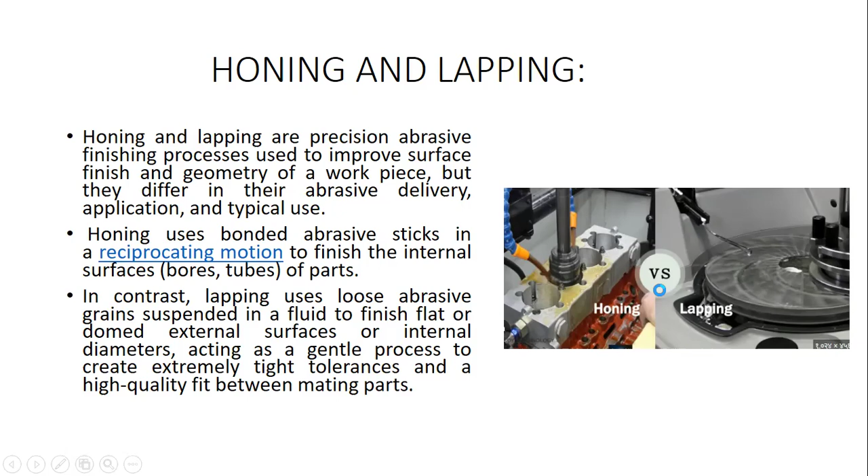So here we can see the pictorial representation of the honing process as well as lapping. The purpose of the honing process is to enhance the geometry and create a more precise, fine cross-hatched surface finish on the internal diameter of the hole.

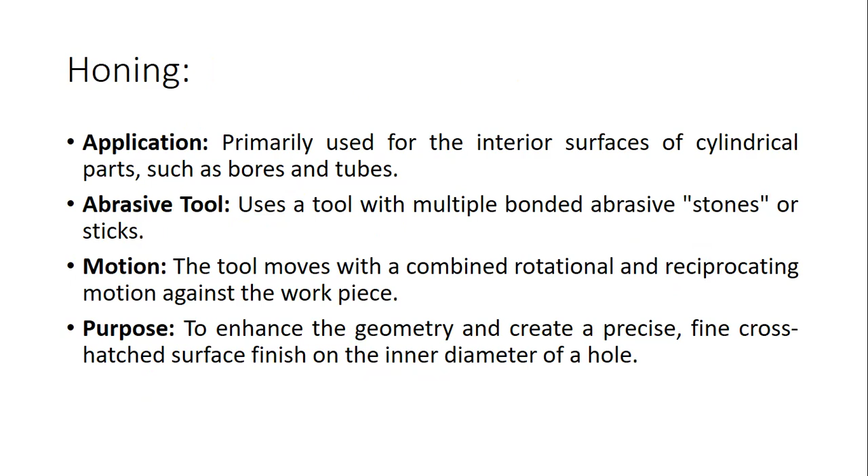The application of lapping, the next subsequent operation: it is used for both internal and external flat surfaces to correct minor imperfections in the material by achieving the precise dimension. Here the abrasive tool utilizes loose abrasive particles suspended in a fluid that are pressed between the workpiece and a soft lap tool.

The workpiece is typically pressed against a rotating lap plate, which can also rotate or reciprocate sometimes. The main purpose is to create a superior surface finish, perfect flatness in the material, and an extremely close fit between the two mating components by removing minimal material.

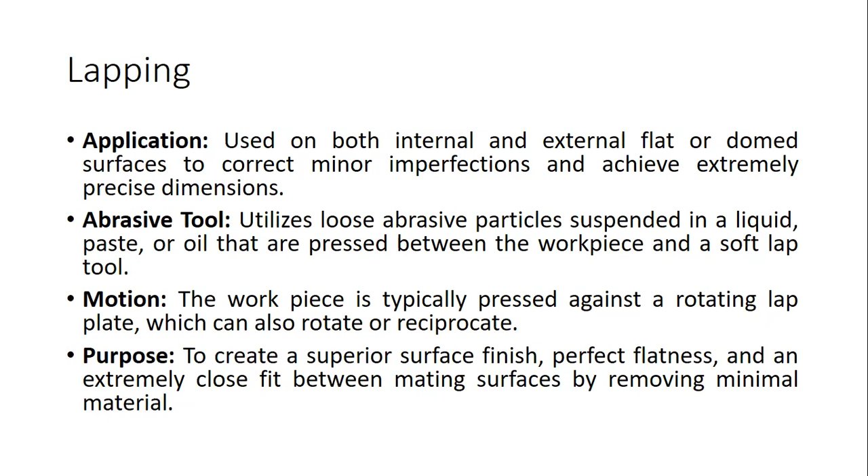What are the main key differences between the two processes? In terms of abrasive, honing uses bonded abrasive, lapping uses loose abrasives. Workpiece: honing is used only for internal diameter surfaces. Lapping can be used for both internal and external surfaces. Honing is a combined rotational and reciprocating motion. Lapping involves pressing the workpiece against a lap plate.

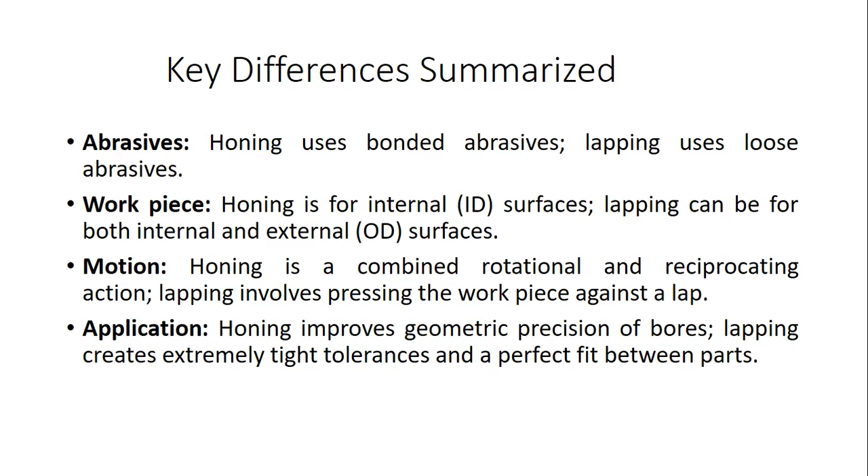Application: honing improves the geometric precision of the hollow bore diameter of cylindrical jobs. Lapping produces an extremely tight tolerance and perfect fit between the two assembly components. So these are some of the key contrasting features of the honing and lapping operations.

The next surface finishing process we are going to discuss is polishing and buffing. So what do you mean by polishing and buffing? It is considered to be a surface finishing process that tries to smooth out the workpiece surface by using an abrasive on a rotating wheel.

Polishing uses high-grit abrasives firmly attached to a surface like a belt or a disc to remove some of the deep scratches and imperfections, creating a lined, brushed finish. Buffing uses a softer rotating wheel with a fine, loose abrasive compound to remove the fine lines from polishing, resulting in a bright mirror-like luster.

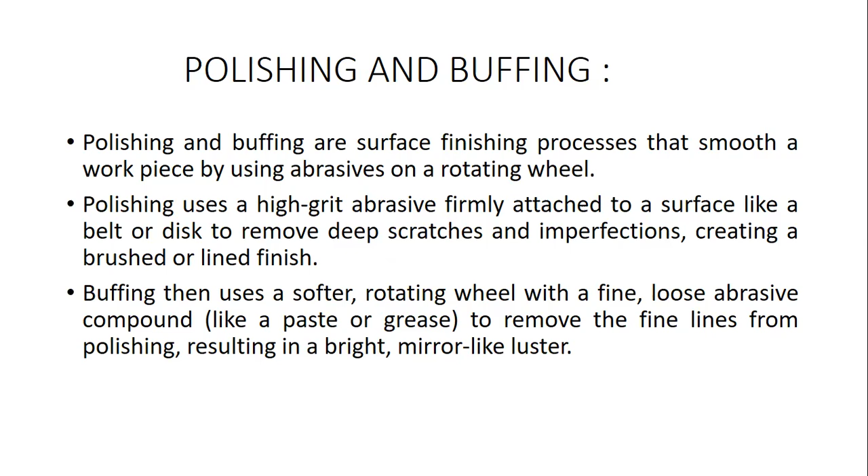So let us understand the polishing process. Initially we have to do the surface preparation of the material. The surface is cleaned to remove any dirt, oil marks or contaminants that would interfere with the process. Then applying the abrasive: a polishing tool such as an abrasive belt or a wheel with a disc is used.

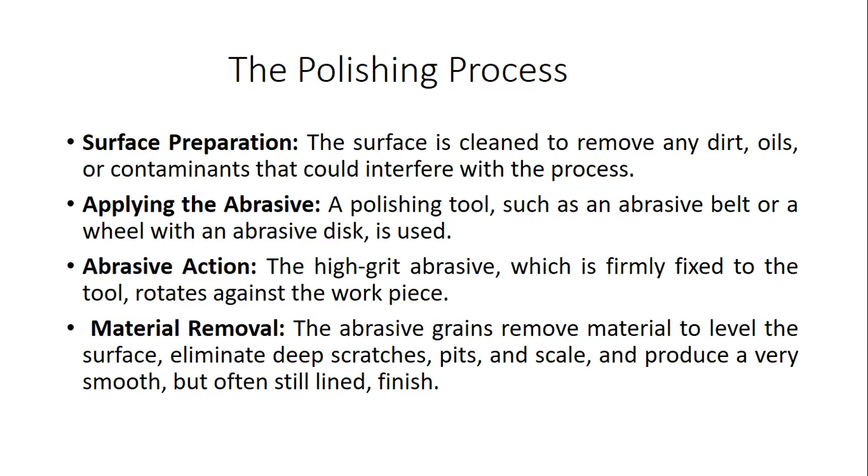Then the high grit abrasive which is firmly fixed to the tool rotates against the workpiece. Then the abrasive grains remove the material to the level according to the surface finish expected by eliminating the deep scratches, pits and scale formation and produce a very smooth surface finish component.

So in terms of buffing process, here the surface refinement can be done by polishing with the help of the prerequisites to ensure whether the surface is smooth enough for the final luster. Abrasive application: a loose fine grit abrasive compound is applied to the rotating flexible cloth wheel.

Buffing action: the rotating cloth will act as a carrier for the compound, which will try to gently remove the fine lines from the polishing stage. So this process creates a final bright mirror-like surface finish, achieving a high luster.

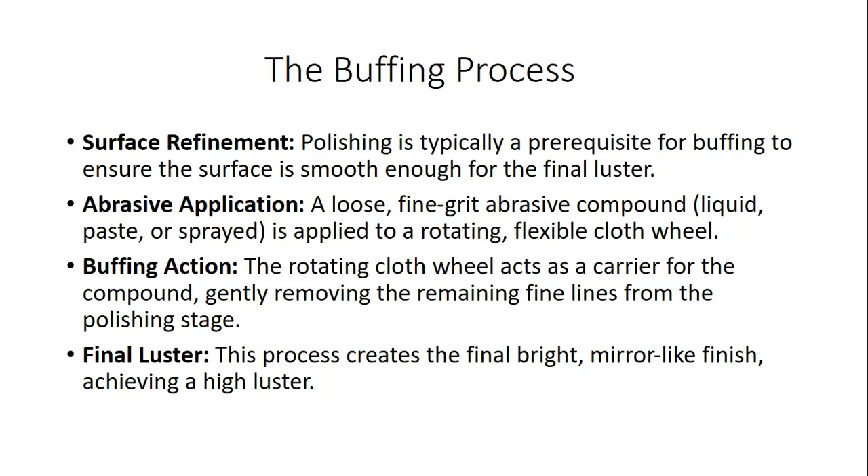So what are the key differences between polishing and buffing? Polishing uses high-grit abrasive that is fixed to the surface of the wheel, while buffing uses a loose, lower-grit abrasive compound applied to the wheel.

Polishing is a very harsh process with an abrasive disc or belt, while buffing is considered to be softer, with a flexible cloth wheel. Polishing creates a smooth but lined surface finish, whereas buffing removes those lines to achieve the high glossy mirror-like appearance.

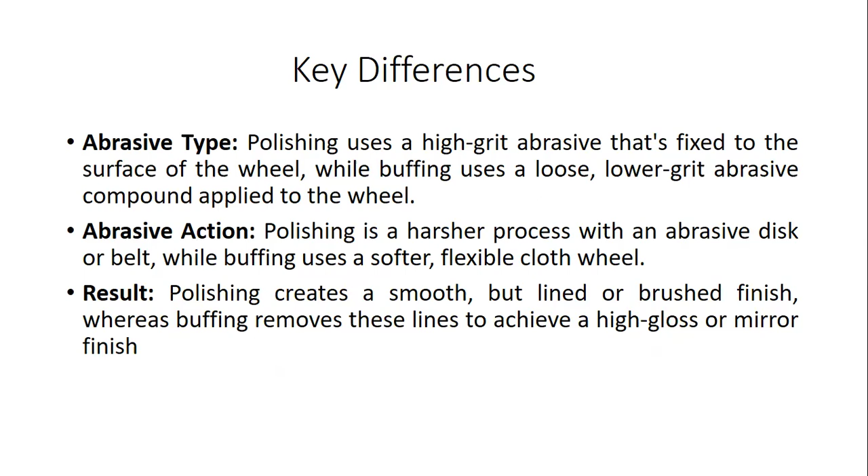The next one we are going to discuss is grinding operation in surface finish. A grinding operation uses a rotating abrasive wheel to achieve smooth, precise and highly accurate surface finish on the workpiece material, where conventional machining is not suitable enough.

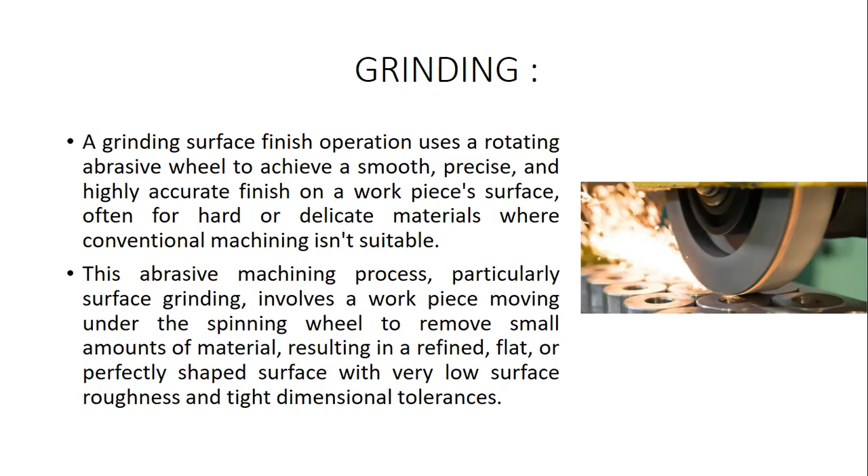The abrasive machining process, particularly surface grinding, involves a workpiece moving under a spinning grinding wheel to remove small amounts of material, resulting in a refined, flat, perfectly shaped surface with low surface roughness and tight dimensional tolerances.

How does the grinding operation work? The grinding wheel comprises abrasive grains like aluminum oxide and silicon carbide, held together by a bonding agent, which act as a cutting tool. So the abrasive wheel acts as a cutting tool. And these are the materials used to make the grinding abrasive wheel: aluminum oxide and silicon carbide.

The rotating wheel comes into contact with the workpiece surface, with each abrasive grain acting like a miniature cutting tool that removes small chips of material from the surface. The workpiece is held on a reciprocating or rotating table, moving precisely against the grinding wheel in order to ensure consistent and accurate material removal.

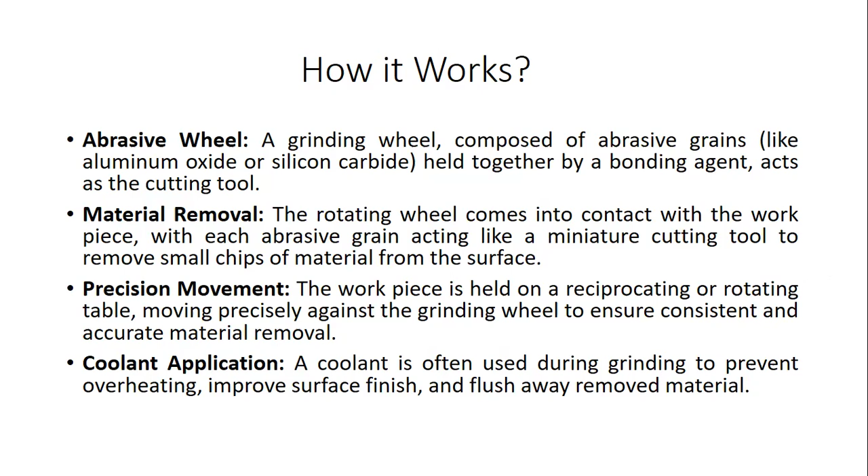Parallelly, coolant is often used during grinding to prevent overheating, improving the surface finish and flushing away the removed material. What are the common types of grinding operation? Surface grinding, cylindrical grinding, and internal grinding.

The most common type, for flat surfaces, involves a rotating wheel and a reciprocating workpiece. Cylindrical grinding is used for finishing cylindrical and external surfaces. Internal grinding will achieve high surface finish on the inner part of bored components and hollow holes.

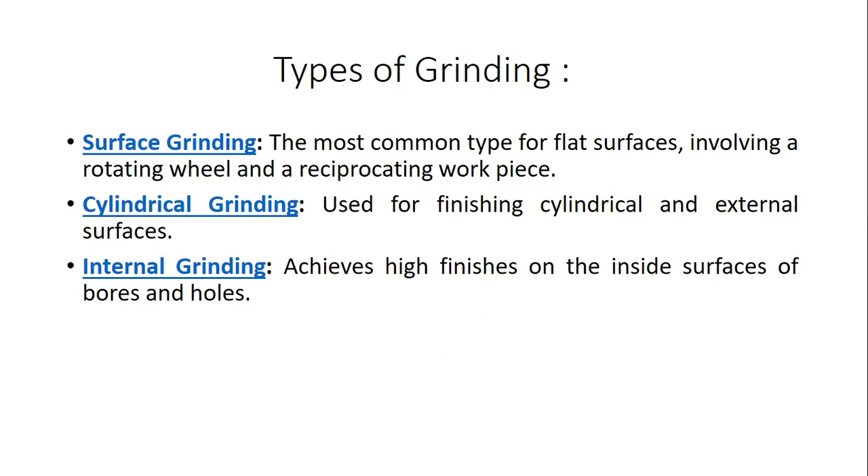So in conclusion, the surface finishing process is one of the most important operations, which enhances component durability, functionality and appearance by modifying the surface texture through various methods like grinding, coating or even chemical treatments. A proper surface finish can improve corrosion and wear resistance by reducing the mechanical friction between the moving parts.

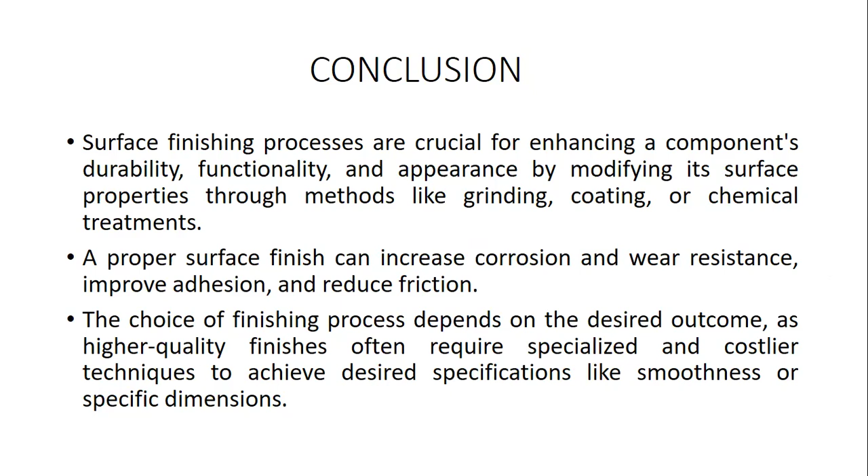The choice of the surface finishing process mainly depends upon the requirement; high quality finishes often require specialized and costlier techniques to achieve the desired specifications like smoothness or specific dimensions.

So with this information, I thank all the student members. We have completed nearly 4 chapters in manufacturing process. The last one is polymer materials, which we will discuss in the subsequent lecture. That is chapter number 5.